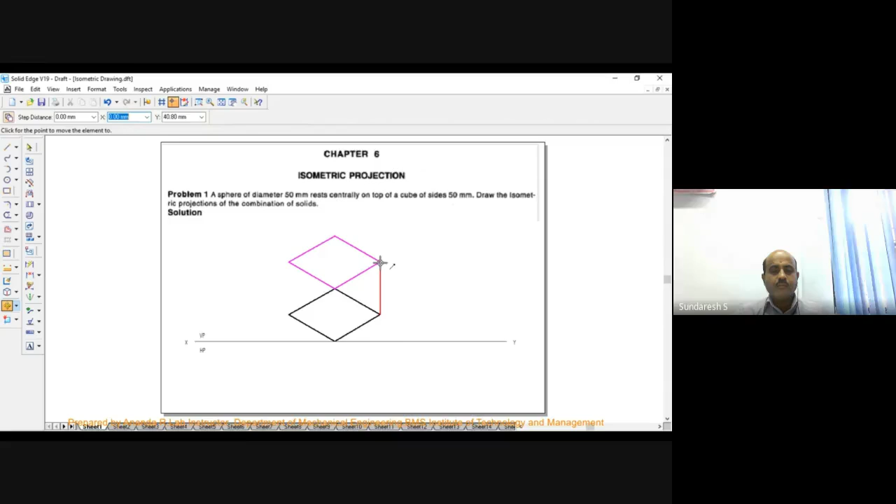Just observe, I will explain once again.

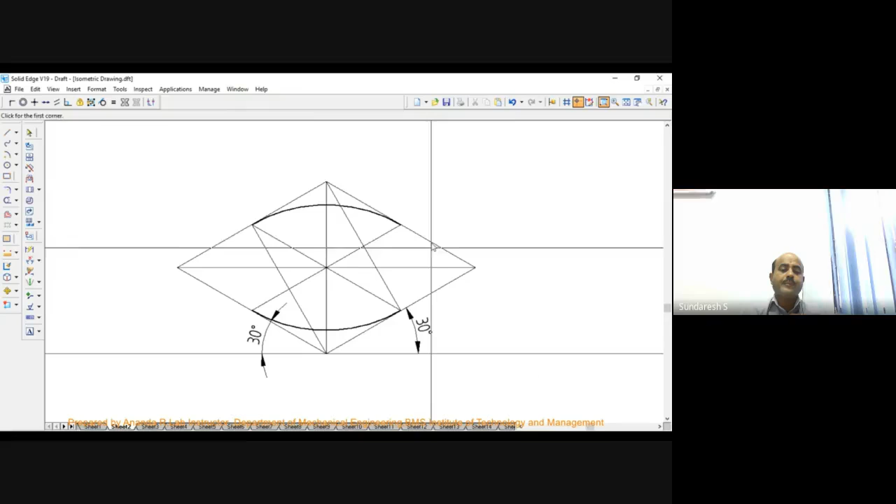So they are constructing an isocircle by using the four center method, what I explained in the previous session. Here, the combination of solids is a hemisphere placed over a cone.

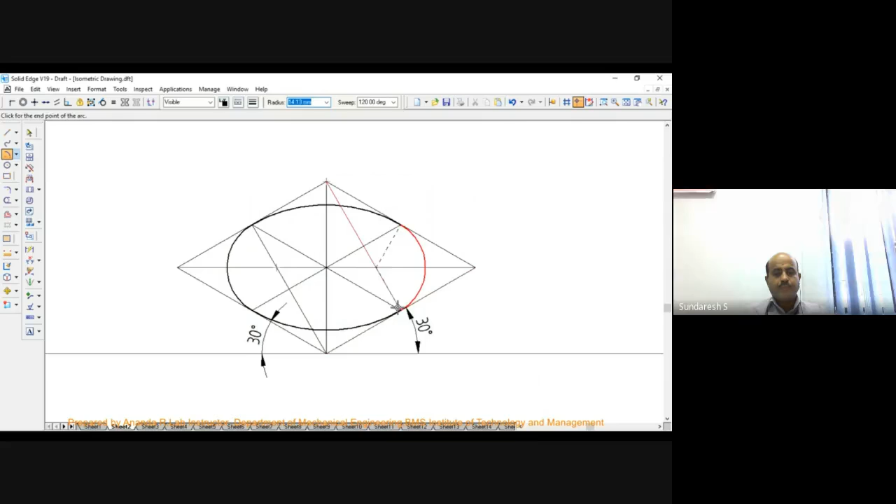So this is the base of a cone. The base of a cone is circular - in isometric, we can say that is an isocircle. Now they are taking the height or the length of the axis of the cone, which is 50 millimeter, and now they are measuring the distance at which the hemisphere should be placed. So this is the axis length.

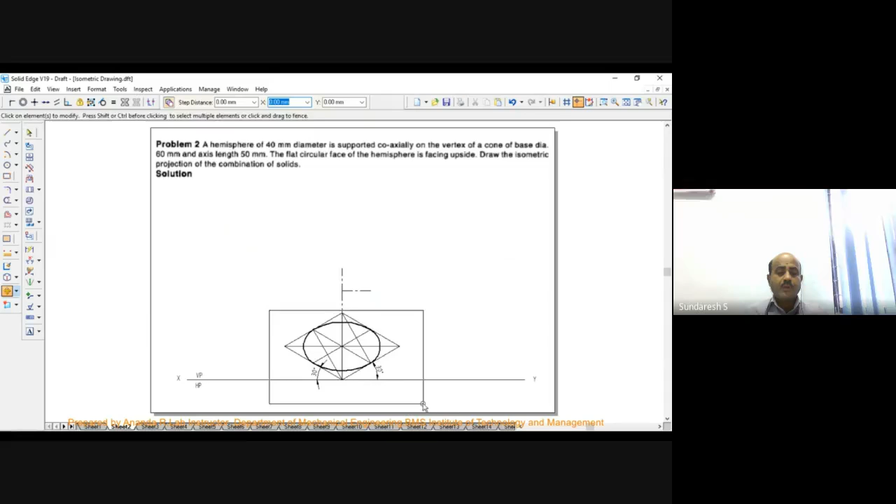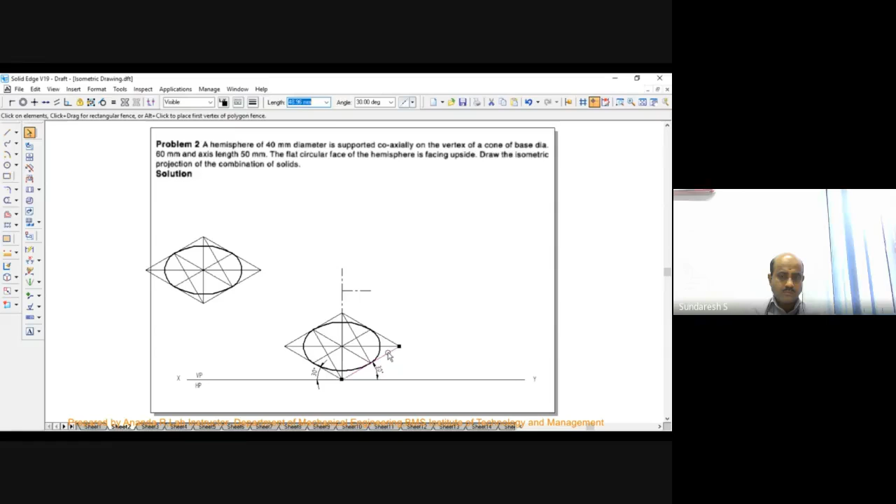Now how they will join, see - they are drawing the tangent to the cone.

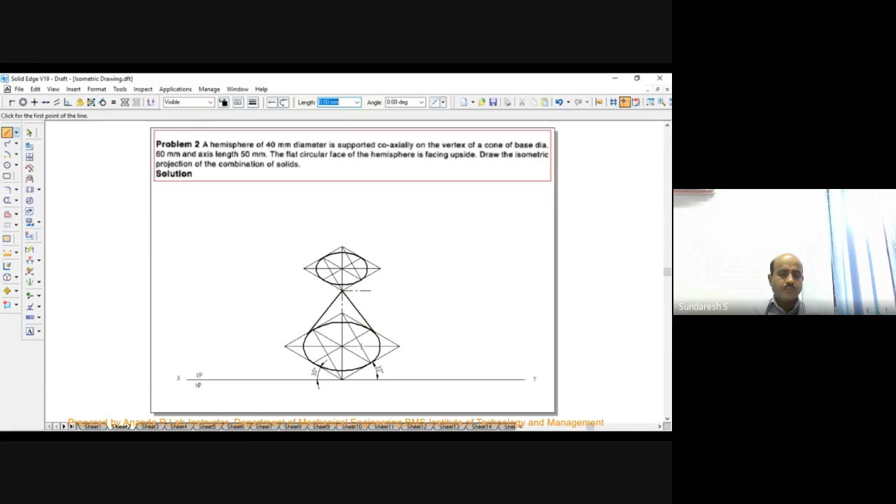This is the construction of a hemisphere.

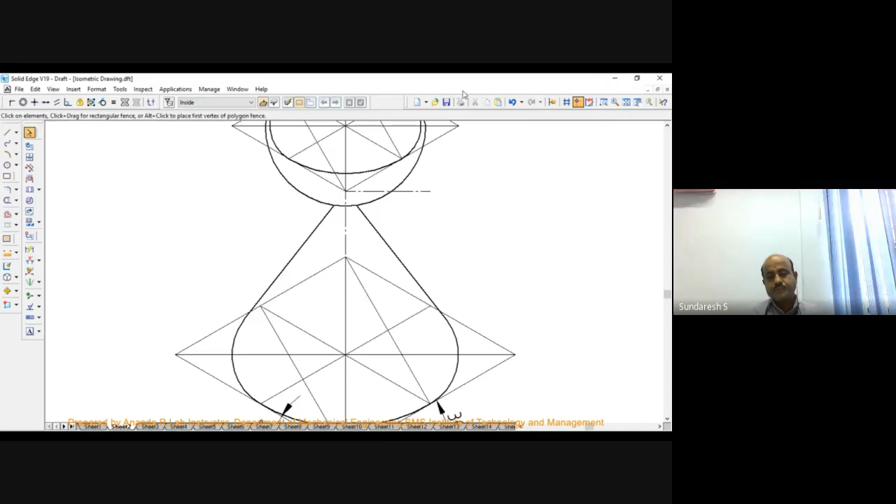Okay, so what we have done is - let us discuss now. First you draw a horizontal line. So there's a problem of a sphere which has been kept over the top of a cube. So draw a horizontal line.

Now you have to first draw the bottom solid, which is a cube. The side of the cube is 50 millimeter.

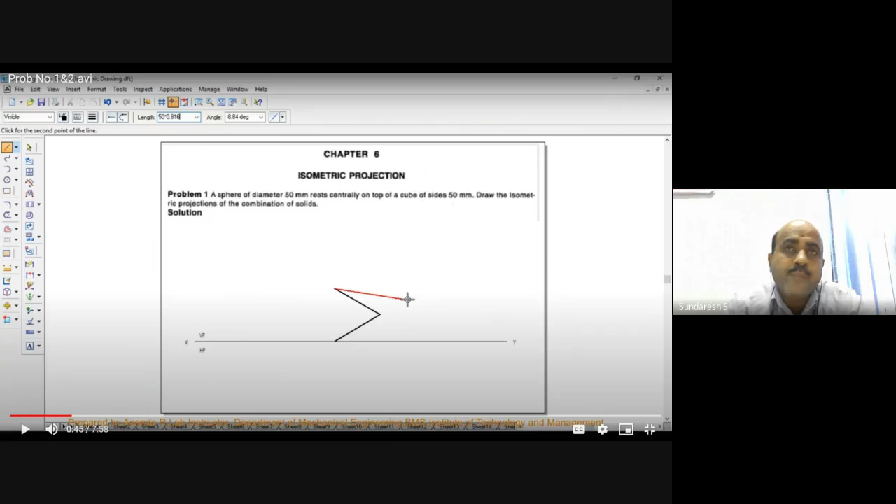Whatever dimensions you are taking, that needs to be multiplied by 0.816. Please remember this, don't forget this. Of course, when you are doing it on grid sheets, no problem at all, directly each box is having a 0.816 factor. So if it is 50 millimeter, if you take 5 boxes in your grid sheet, directly it will be 50 multiplied by 0.816 only. So no need for changing it if you have a grid sheet at the back of your sketchbook. Directly you can measure 5 boxes that will represent 50 into 0.816. So therefore, no problem if you have a grid sheet, easily you can complete the sketching manually for isometric projections. If you don't have the grid sheet, you have to multiply each dimension by 50 multiplied by 0.816.

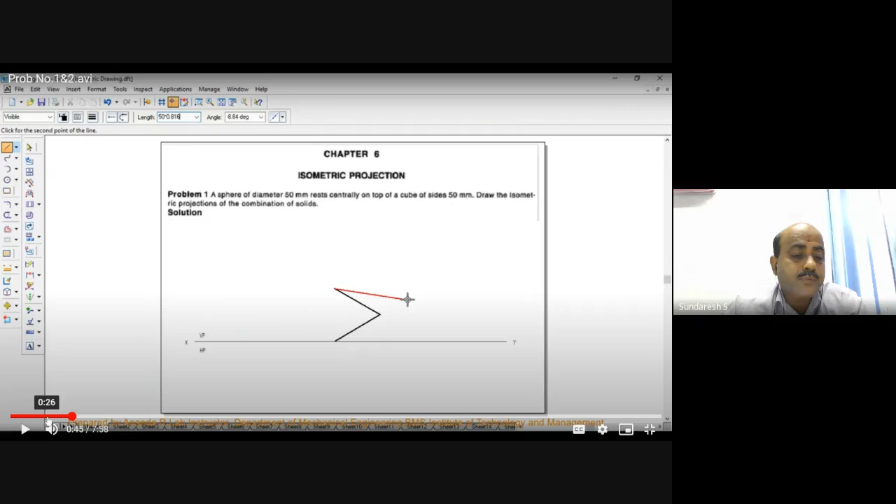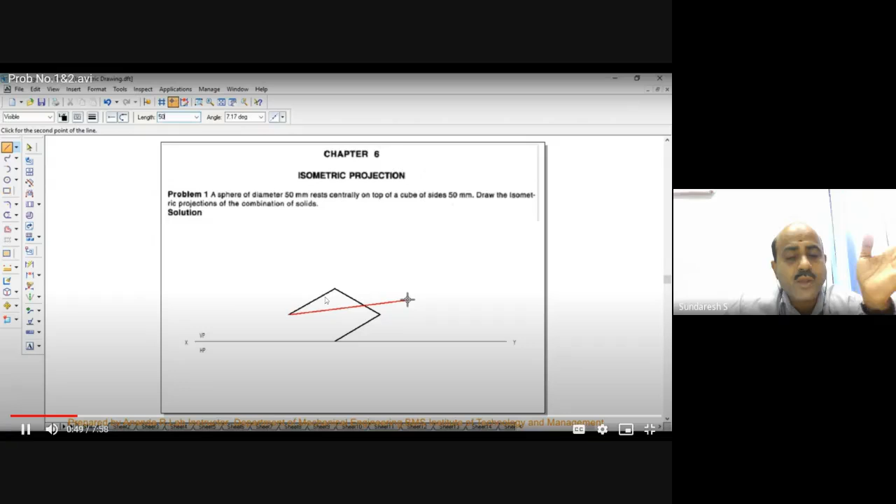So you have to get the dimension, then you have to draw them. So what they have done here is, multiplying 50 by 0.816. So they are drawing a line for 30 degrees first, and then they are taking minus 8.84 degree in this direction. Of course, you can draw with the sketch sheets, not an issue. Directly you can draw with parallel lines and you can complete this.

So this is the base of the cube. So what is the height of the cube that is given? It is 50 millimeter only. So again, you have to draw the vertical edges of the cube by multiplying 50 by 0.816.

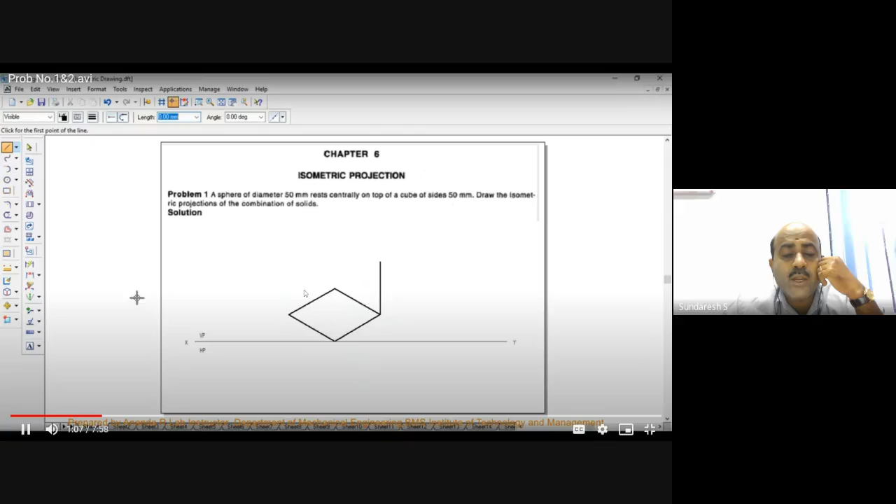So here we have one simple option for you. You can copy the base and paste it. Copy and move to the point where you have got it, and you can paste directly. You can get the top face of the cube. So this is the simplicity where you can get it when you do it on a system.

But this doesn't happen when you are doing it manually. When you do it manually, you have to construct 4 vertical lines of length 50 multiplied by 0.816, then again you have to draw lines parallel to this. So this is how you will construct it manually. But when you are doing it on a system, it is very simple. Directly you can copy it and paste it. So it takes hardly around 2-3 minutes for you to complete this.

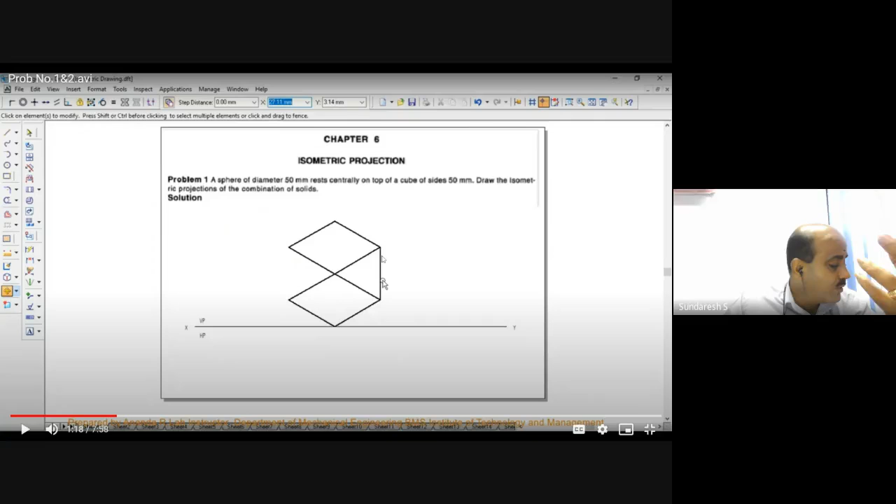Isometric drawing on a system. So just continuing, joining all those edges here.

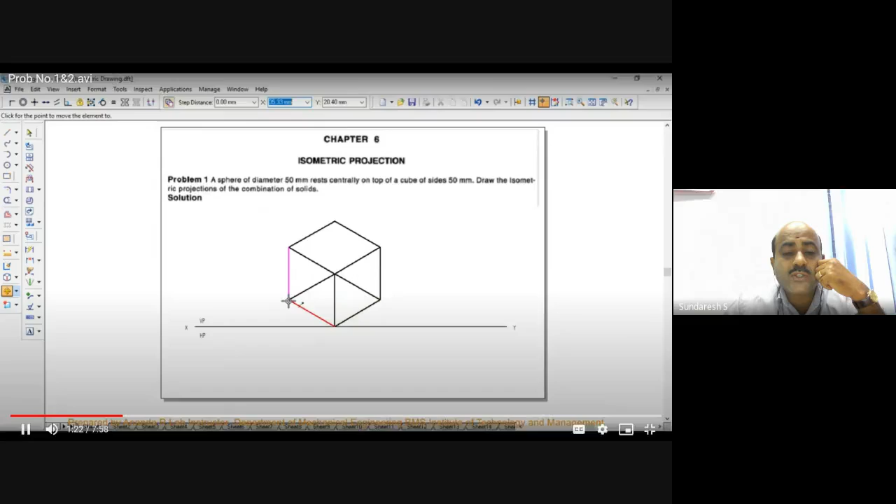So you can remove this, these are all unwanted, this is invisible edges. Invisible edges should not be shown in the dotted line, as we discussed for solids. So invisible edges should be removed, taken out, and it should look like a cube. See, this is a cube, a 3-dimensional object, a cube. So the invisible edges should not be shown here, no necessary. So you can delete those and complete the solid. Next,

Now you have to place a sphere over the center of the cube. So for that, first you have to locate the center of the cube, the top face center. You mark it, draw a line, and from there you take the center and draw a line. This height will be the height that you will take. When you are placing a sphere over a cube, the center height of the sphere should be measured from the top face of the cube. So first you have to locate the center, the top face center of the cube. From there, you have to measure a distance for the center of the sphere, which is equal to the isometric dimension.

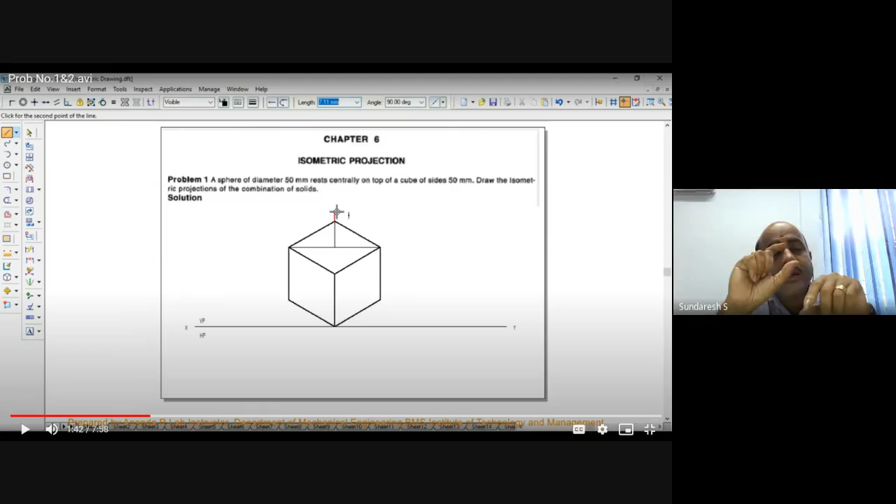Isometric dimension in the sense, we have a sphere of diameter 50 millimeter, right? So when you measure the distance of the center of the sphere from the center of the top surface of the cube, that distance should always be an isometric dimension only. In the sense, you had to multiply 50 by 0.816, and that corresponding distance, sorry, that is the radius, right? It is radius, sorry, not diameter, it is radius. So radius is 25, 25 multiplied by 0.816. So you had to measure that 25 into 0.816, and then you have to draw the line for that particular isometric dimension only.

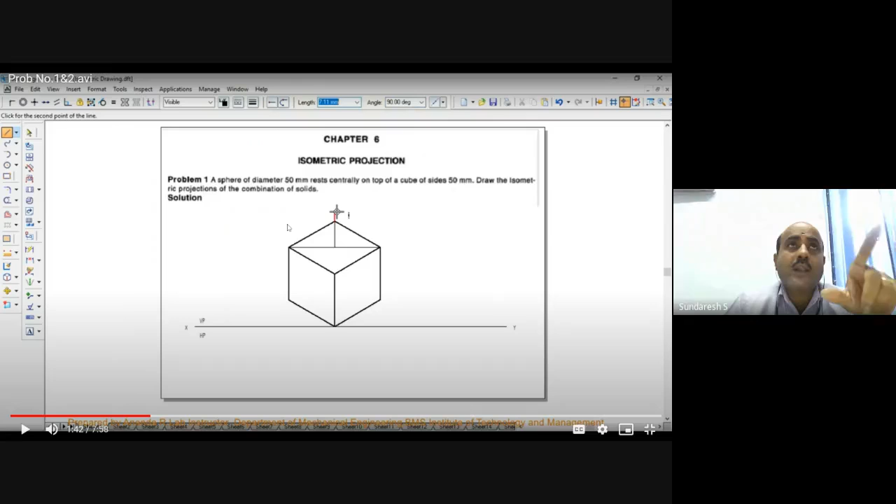So be careful while you are doing this. But when you're drawing the sphere, the radius should be equal to the actual radius only. Be careful: the center height will always be the isometric dimension, whereas the radius or diameter of the sphere should be taken as the actual dimension only. So look at here.

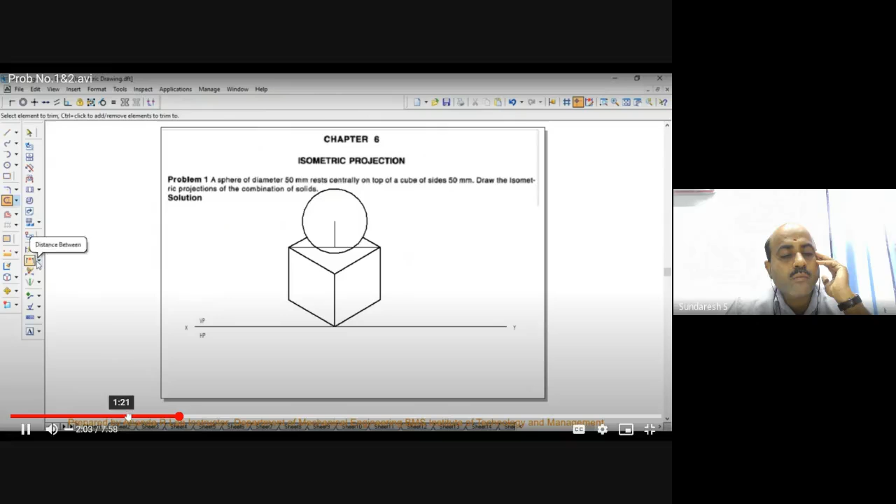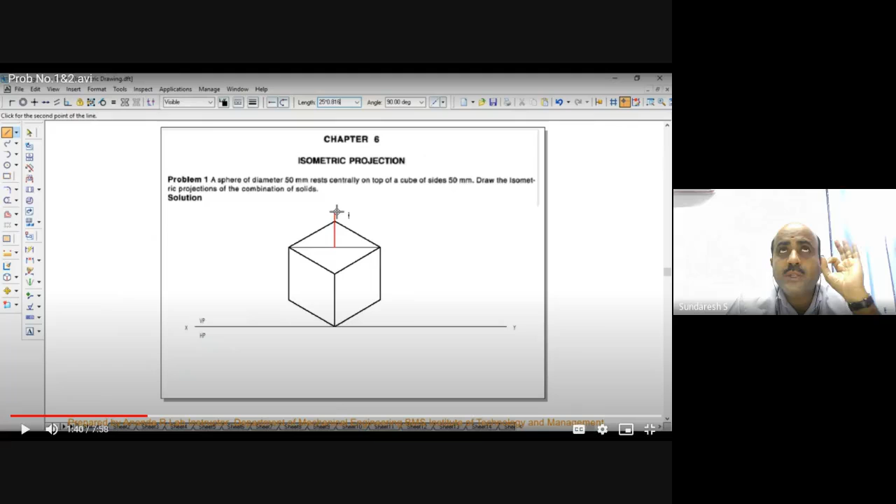See, just I'll go back. Just see now, say 25 into 0.816. This is what I am talking about, taking the center of the sphere. Center of the sphere will be 25 into 0.816. So that distance, that vertical line, you have to mark, draw for a point 25 into 0.816, and that point will be the center of the sphere.

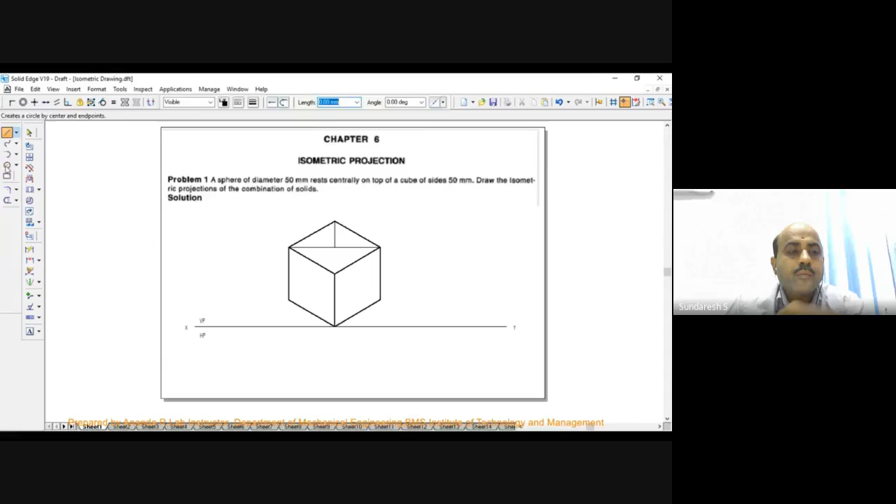Now you are drawing a sphere for its actual diameter 50 millimeter, and you are placing it exactly at the center where you have marked it.

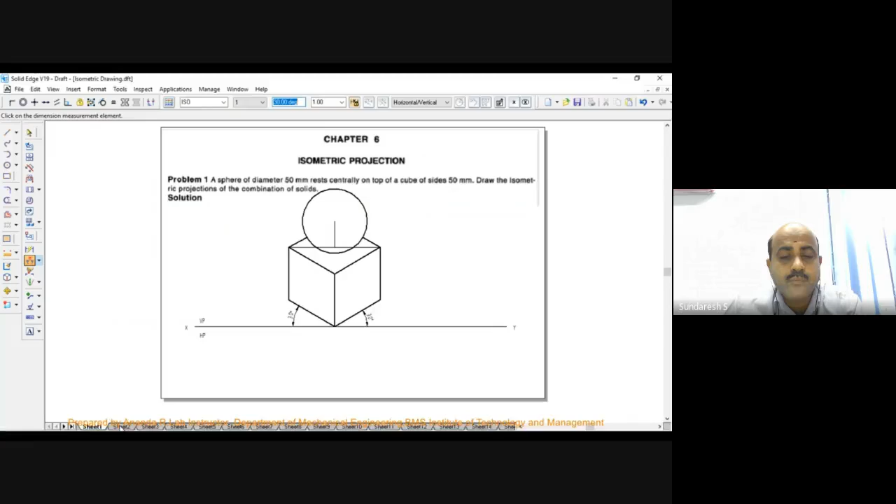This is the one problem. So this is the combination of two solids. One is a cube, another one is a sphere. So the sphere has been placed centrally over the top surface of the cube. This is for 35 marks.

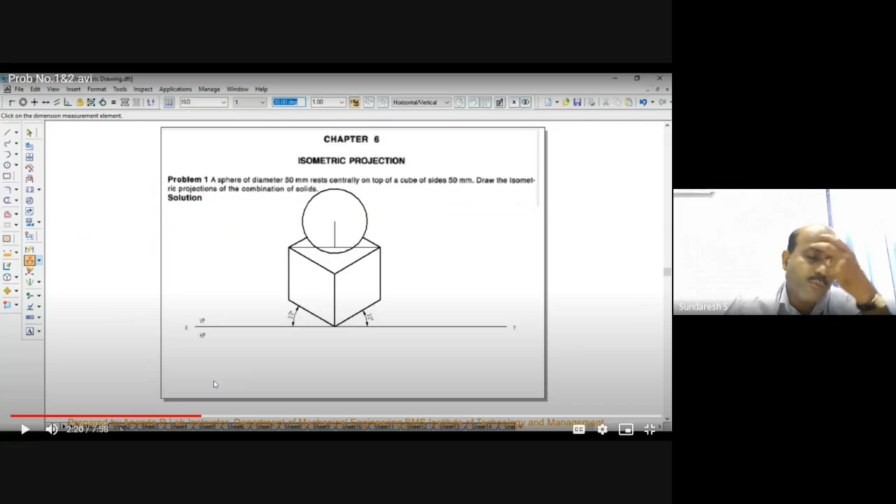So we'll have another problem where a hemisphere is placed over the top of a cone. That we will go into now. So this is the second problem. Here, a hemisphere of 40 millimeter diameter is supported coaxially on the vertex of a cone of base diameter 60 millimeter and axis length 50 millimeter. The flat circular face of the hemisphere is facing upside. Draw the isometric projection of the combination of solids.

So this is a hemisphere placed over the vertex of the cone of base diameter 60 millimeter. Again, there are two solids here: one is a hemisphere, another one is a cone. And here the hemisphere is placed over the vertex of the cone. So the bottom solid will be a cone and the top solid will be a hemisphere.

So now first we'll start constructing the cone, because generally we start with the bottom solid, and then we'll go for the top solid. So bottom solid means a cone. Basically a cone has a base which looks like a circle. Therefore, whenever you have a cone or a cylinder, you have to start with constructing a circle, which we call an isocircle in isometric projections.

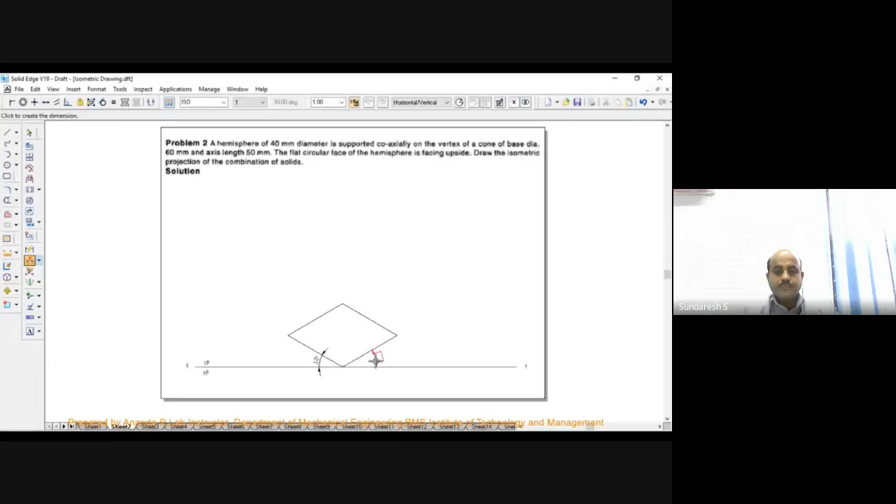So they are constructing this by the four center method. First, you have to start with the box, which has sides equal to the diameter of the base of the cone.

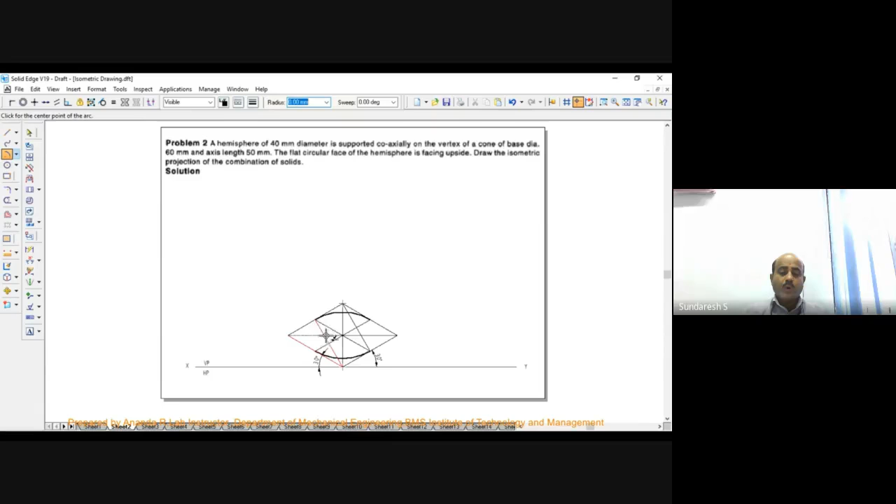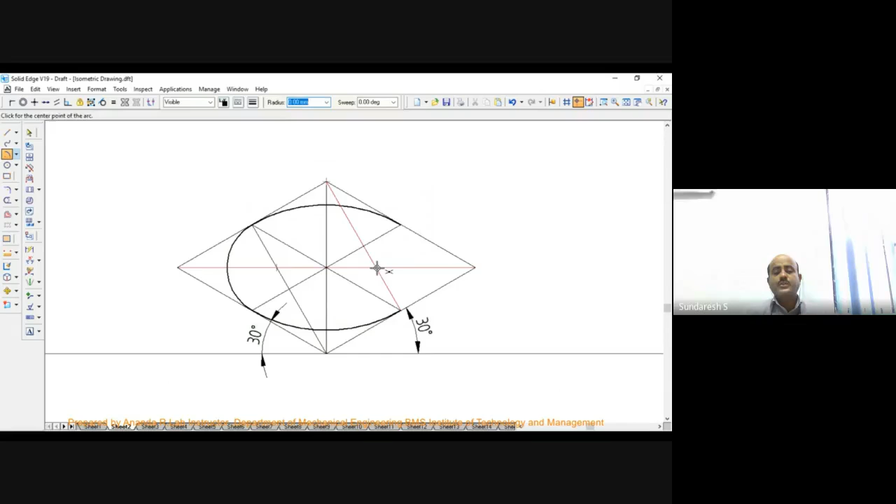Now you have to mark the midpoints correspondingly. Those radii should be taken using four different centers. Look at that: one center is here, this is the second center, you are drawing an arc. Then they'll start with the third center. This is the third point where you join the arc here. This is the fourth center. Yeah, this is the completion of the base of a cone, which is an isocircle here.

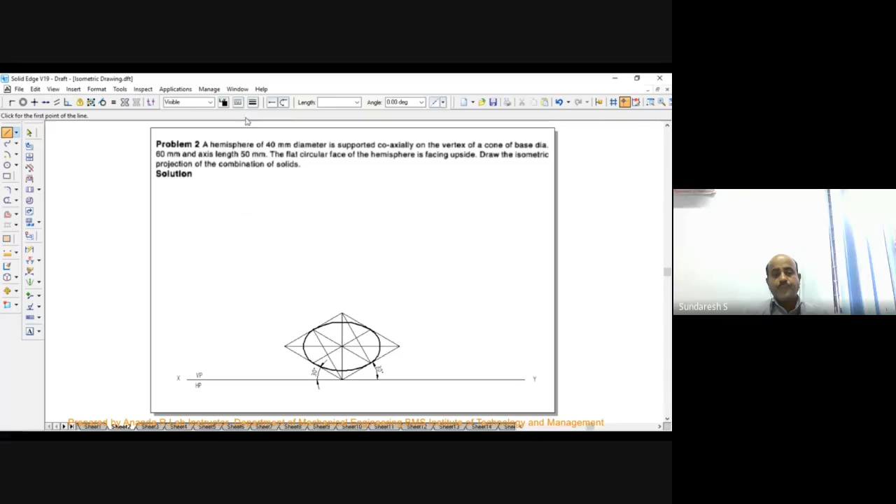Then they will go to mark the height of the cone, or the axis length, which is 50 millimeters, 50 into 0.816. Look at that length they have to measure.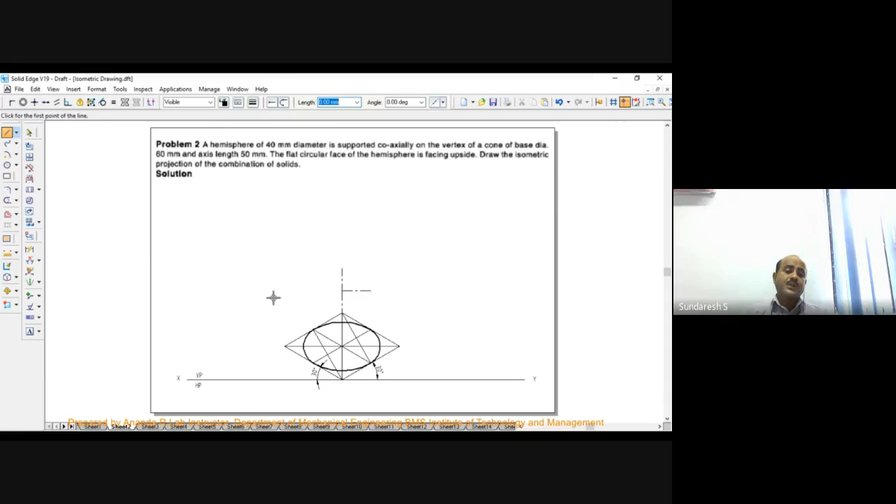The center of the hemisphere, which is 20 into 0.816. So 40 is the diameter, and you have to take the radius. Radius is 20, 20 multiplied by 0.816. That is the center. So now they have to construct the hemisphere, 40 millimeter side.

We have a scale command where you can scale it down.

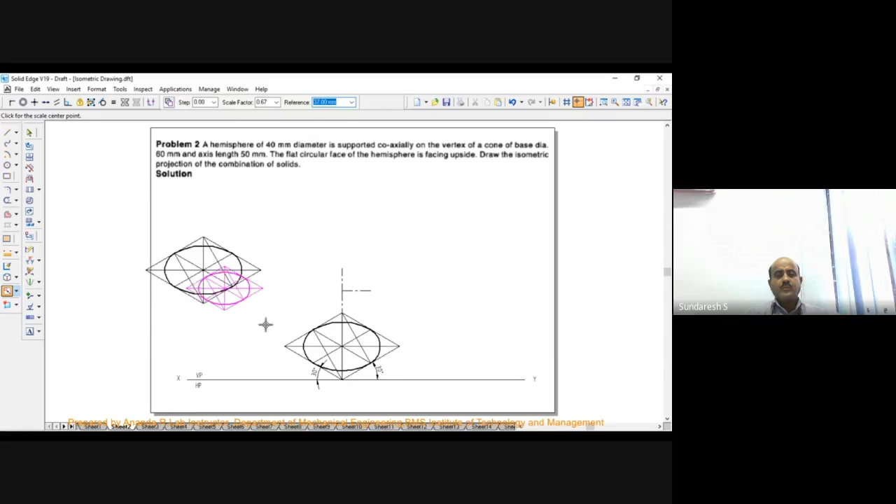So you can do this also. Otherwise, you can do it by constructing the top of the hemisphere as an isocircle separately, and just paste it over the center of the sphere, right?

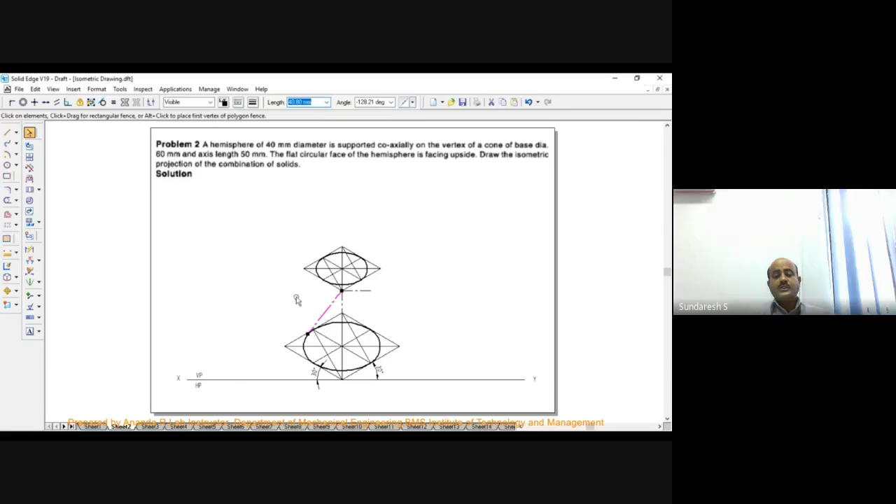So now for the cone, what you have to do is draw the generator of the cone, so it should be a tangent, tangent to an isocircle from the apex.

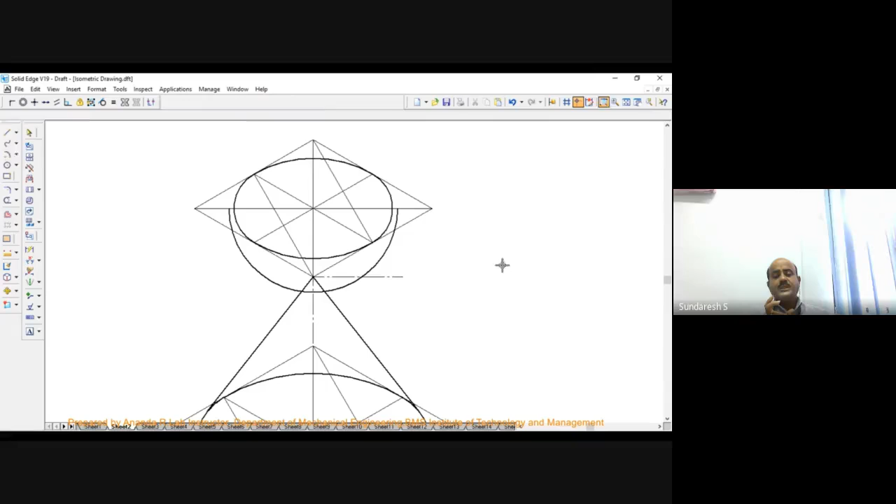So now for the hemisphere, after drawing the top face as an isocircle, you have to take the center. From the center, you have to take the actual radius, and you have to draw that. Okay, now look at here.

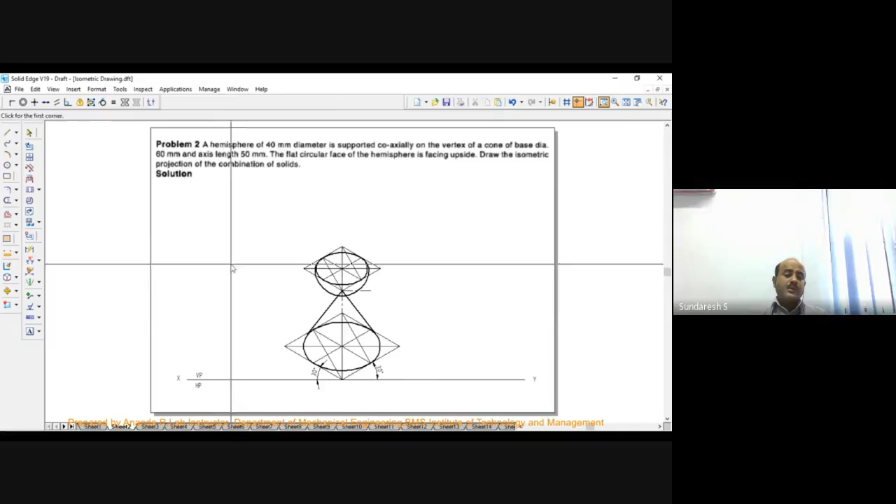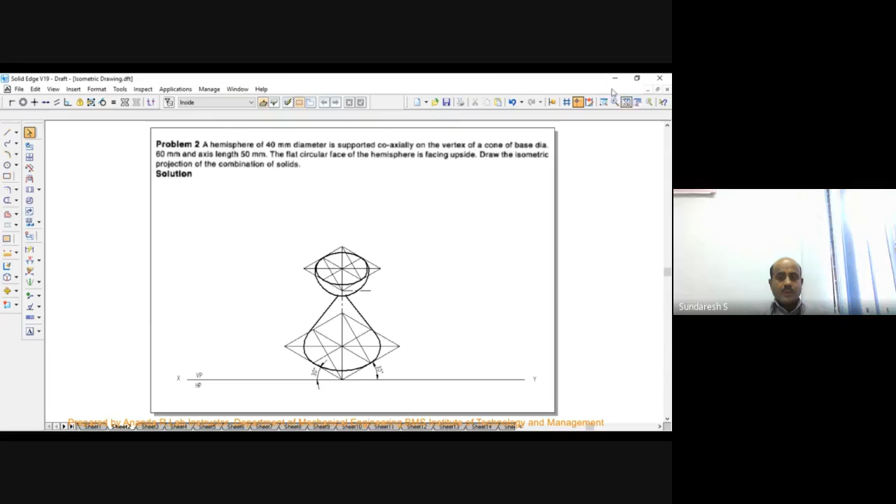So this is the completion of the second problem on isometrics, where the hemisphere is placed over the cone. So the lines which are not visible, you can just trim them off. Got it? Okay.